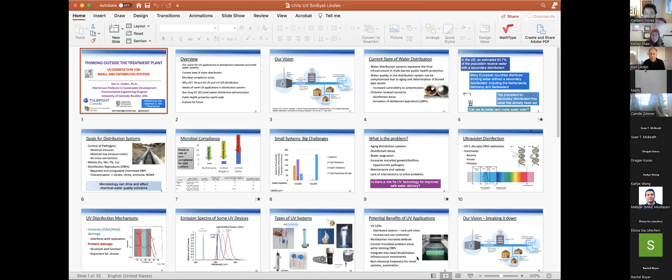Awesome. Can you see my screen okay?

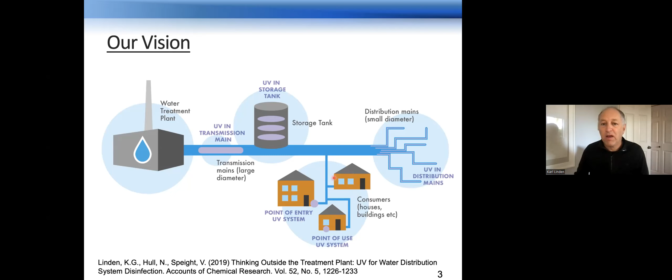Certainly UV is used in a lot of those systems that take water from lakes to protect the water in the household. At the point of use in the faucet or in, say, a water cooler, UV is already used in those applications. How can we bring UV more into the public as well? And then as we get deeper into the distribution system, is there a way with UV LED technology maybe to bring UV light into distribution systems and smaller pipe networks and help minimize biofilm formation in buildings and other distribution branches, and thinking about control of opportunistic pathogens in those cases as well.

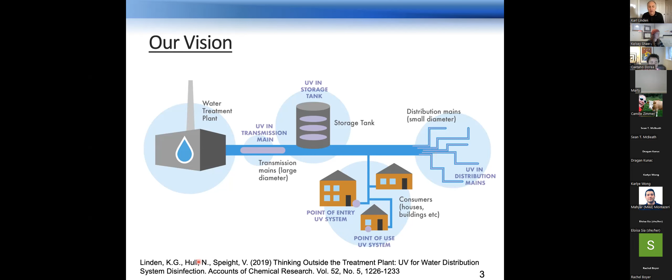We laid this all out in a kind of think piece a couple of years ago in Accounts of Chemical Research. My co-authors, who I'll introduce a little later, Natalie Hull and Vanessa Speight, helped with this vision. So what is the current state of water distribution? We know that this is kind of the last opportunity to protect public health, in thinking about water.

Oftentimes the compliance point is as it's entering the distribution system, and what happens in the distribution system could be a challenge as far as degrading water quality. We know that aging of pipes and deterioration of infrastructure can contribute to problems, whether chemical based or microbial based. And we also know that most water systems in North America are required to have a chlorine residual, and as that residual decays, there are opportunities for pathogens to form and grow in biofilms. We also have the concern with chlorination of the formation of DBPs, or disinfection byproducts. So that's another concern because we use chlorine.

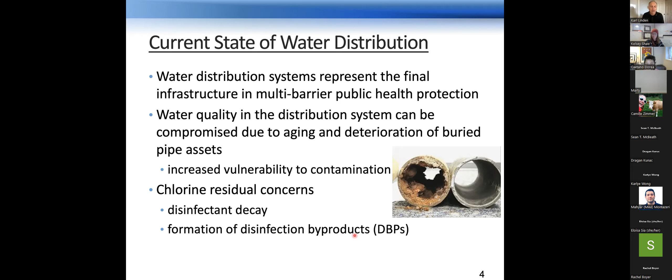In the US, about 94% of the population receive water with a secondary disinfectant. A lot of small systems aren't required if they're small enough. But in many countries around the world, especially some European countries, there are water distribution systems that don't use secondary disinfection. This includes systems in the Netherlands, Germany, and Switzerland. And when you look at those systems, they're operating fine. People are not getting sick all the time.

Certainly they do water treatment a little bit differently than we tend to do in North America. They're more biologically focused, perhaps, using biological filtration or granular activated carbon, whereas we tend to shy away from those things. But it's a fact that many countries don't use any secondary disinfectant, but we're required to in Canada and in the US. So the precedent for not using a secondary chemical disinfectant has already been set.

But we have all these problems, and is there a way we can think about other alternatives? Is chlorine really the end of our solution set to help protect public health as water moves through the treatment plant into the distribution system? Certainly, I think we can do better, and we can have safer water.

As far as distribution systems go, some of our goals are to control pathogens for sure. We want to minimize intrusion events. We want to avoid low pressure events where contaminated water might get into the system. Certainly, we don't want any cross connections. We're concerned about metals. Lead is a huge issue in many systems. And obviously DBPs, whether from chloramination, we can even think about NDMA as a DBP, but certainly the regulated and unregulated chlorinated disinfection byproducts.

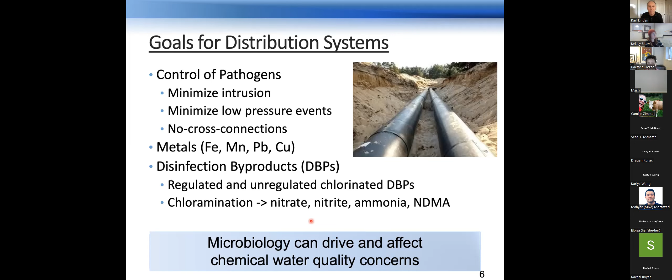We know all of these issues are also driven by the microbiology in the system, and chlorination puts pressure on the microbial communities that are able to thrive in water. That could also be contributing to some of the problems that we have through that selective pressure.

And so you ask the question, I thought chlorine is supposed to protect us against microbial issues in the distribution system. But in the Netherlands, there's no chlorine residual. In the UK and the US, there is a chlorine residual applied, yet we have these challenges of non-compliance that are higher than in countries that don't even use chlorine. So this brings a lot of questions to my mind, something I've been thinking about since working on UV technologies. And when you look at small systems, we've had bigger challenges.

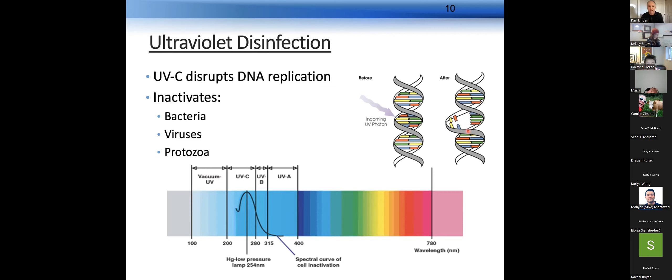And especially for viruses, this is really important because viruses use proteins as part of their infection cycle. The fiber proteins or proteins on the outer parts of the virus act to actually find the host cells.

And if we can damage those proteins, the virus won't be able to find our host cells, won't be able to cause an infection in the first place. So protein damage tends to be very important for virus inactivation. And we find these low wavelengths are very, very effective for viruses.

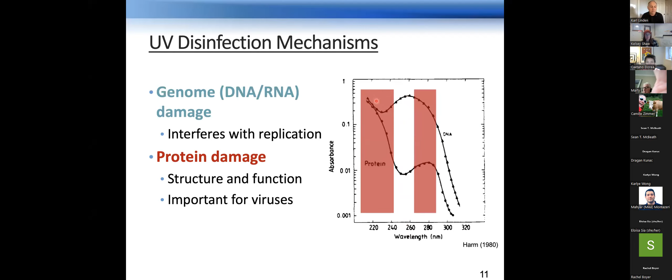In fact, sometimes up to 10 times higher than the typical UV at 254 nanometers, which is used for most disinfection applications. So low wavelengths are also really interesting to use in a big research area and a number of research groups. There's many types of UV devices that you can use.

These are exactly the same construction, except they don't have that white phosphor coating on them. They're just clear quartz. And the UV light generated in those mercury lamps is purely at 254. And that's very effective for inactivation, for DNA damage. But there's other UV sources that are really exciting too, especially the LEDs.

And then we also have the krypton chloride excimer lamp, which is a new technology we've been working with quite a bit that emits really purely at 222 nanometers. And I'm really excited about this because this is really enhancing virus inactivation. And also this is a wavelength that is fairly safe to use around humans. It doesn't absorb deeply into skin or eyes.

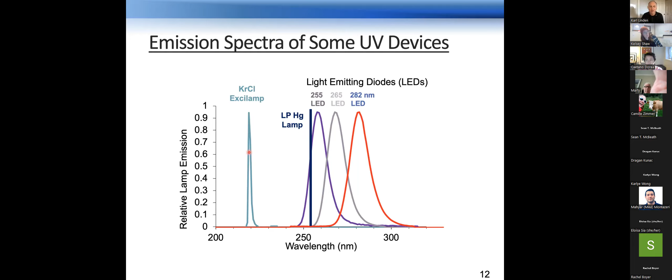I just actually was out canoeing in the Algonquin region outside of Toronto 2 weeks ago. It was a really beautiful canoe trip. Brought my SteriPen, just took the water out of the lakes there, just put a SteriPen in there, 30 to 90 seconds, and disinfected the water, drank it the whole time, didn't get sick. It's great technology. I really love bringing it places, especially when you travel internationally as well.

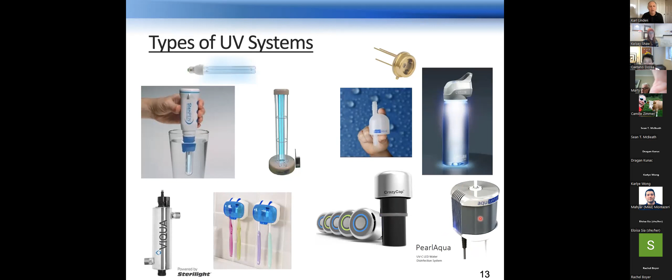So lots of opportunities for UV. These are just, you know, tip of the iceberg kind of applications. There's way more that you can imagine as well. So what are the benefits of UV? I mean, for LEDs, thinking about these small chips, these are really small millimeter sized UV emitters.

I mean, if we can get these distributed, we can put them all over the place and have disinfection. Really think about distributing LEDs around in pipe networks or for protection of water sources, but certainly increasing the end user protection in this case, whether it's on your faucet or under your sink or in your water bottle. It's definitely part of a multiple barrier microbial defense.

It can control all types of microbes with a very low dose. So very quickly, just a matter of seconds. You saw with the SteriPen, it takes 40 to 90 seconds, but typically most UV systems act in less than 1 to 5 seconds for disinfection, which is kind of incredible when you think about chlorination requires 20 to 40 minutes, maybe 60 minutes, depending upon the dose and the CT value that you're required to achieve. UV acts in just a matter of seconds, and it limits DBPs because there's no chlorine, there's no halogens, there's no halogenated byproducts. So no problem with DBPs at all.

You can easily integrate them into infrastructure. If you can think about putting them on the end of a system, maybe in the middle of a system in a coupling that brings two pipes together, there's no chemicals, and it's really ideal, I think, for small systems where you have a lot of point of use and point of application collection, and you can also automate UV systems. There's no chemicals to use. There's no extra supplies to bring. It's all electrical signals. You can monitor this through a cell phone. So I think there's a lot of great benefits of UV applications.

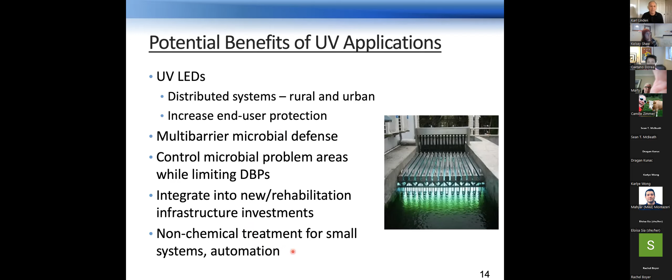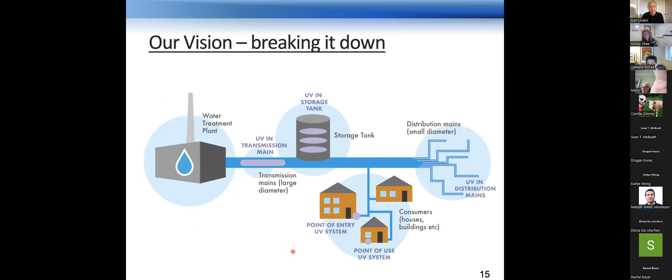So let me quickly walk you through some of the vision that we had in different aspects of UV applications outside of the treatment plant, and then talk about some small systems as well in the study we did. So again, thinking about this whole ecosystem outside of the water plant, at the water plant itself, we know that UV works. It's used as a primary disinfectant. It's used in the largest water system in the world, New York City, where I'm from, I grew up in Manhattan. I'm proud to say that New York has the largest, treating about 2 billion gallons of water every day using UV light, and that's to protect against cryptosporidium mostly.

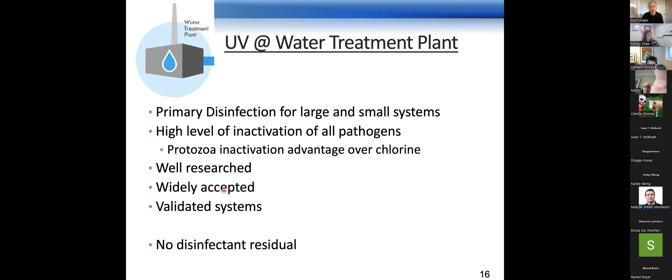It's got high levels of protozoa inactivation, which is great because chlorination doesn't work at all for cryptosporidium, and it's very poor for Giardia. But UV works as fast as it does for anything else. It's really well researched, validated, no problems there. It's used all over the world. It doesn't have a disinfection residual, which sometimes people say is a concern, but in some cases maybe that's a benefit, because in a lot of places maybe you don't want to have that taste and odor issue, or those DBPs. But certainly for treatment plant-based applications, it's well accepted.

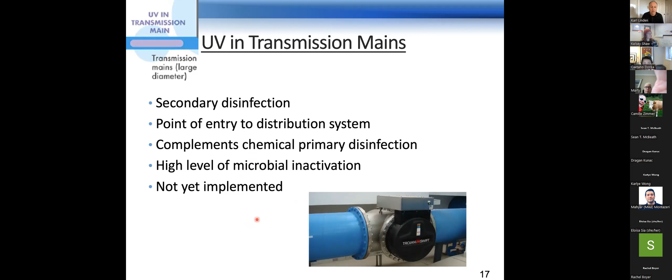In storage tanks. If you've ever been to New York, there's storage tanks all over New York City on top of buildings. I always wonder, where's that water go? Is that used in the buildings that they're serving? Is it just pressure? Is it fire? Whatever it might be, there's storage tanks all over, but these are often ignored, and these can be breeding grounds for microbial growth, for biofilms. There's lots of different ways you can think about adding UV in here. It could be some floating ball that's bobbing around in there. It could be on the lights on top of the ceiling, but these aren't really used yet. And we don't know much. We need to do some research on this.

We don't really know the implications on the materials and if it's really going to control biofilms. Can you pulse it on and off? Do you have to have it on all the time? Is it going to disinfect pathogens? Will it have any impact on water quality? These are questions we need to ask and research we need to do.

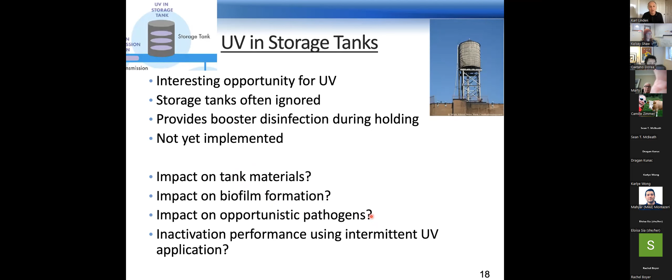But certainly there's good opportunity to add UV in these kinds of situations where you can add some disinfection as the water is being stored. At the point of entry or point of use, UV is already used in a lot of these cases. It's well established as a primary disinfection for water coming out of a tap or water going to a building. Small systems are available, already validated by National Sanitation Foundation. These systems are validated by different organizations as well. This can be an easy way to provide disinfected water on tap, on demand.

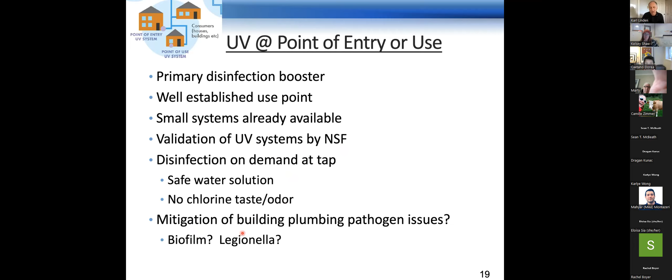There's no taste or odor issues, and a lot of people are averse to chlorine taste and odors if you're not used to that. And then certainly in building systems, it could be helpful for controlling issues around sloughing of organisms, Legionella, those kinds of things.

Then getting out to the distribution system, this is where it gets a little bit far out, but I really think there's opportunities here. Is there a way to maybe control biofilms if we had UV throughout the distribution system, these LEDs kind of embedded into pipe systems? Is there a way to think about adding types of disinfection in these areas of the distribution system? With LEDs, I think there are.

Other things you might think about are these little UV robots that might go through a pipe network and have a bunch of LEDs on the outside, just rolling through the distribution system, disinfecting the biofilms, disinfecting the organisms as it cruises through. Could be part of a cleaning process, could be part of an upkeep process. But there's ways to think about, given the LED technology, how we can implement UV all throughout the water distribution network. But more questions to ask, of course.

What are the pipe materials? Are they going to degrade? Are we really controlling biofilms? Are we controlling opportunistic pathogens? Are we changing the water microbiome even, in ways that we didn't anticipate, that might either offer the opportunity for better control of pathogens, or maybe there's even some type of probiotic effect of UV compared to chlorine. We just don't know.

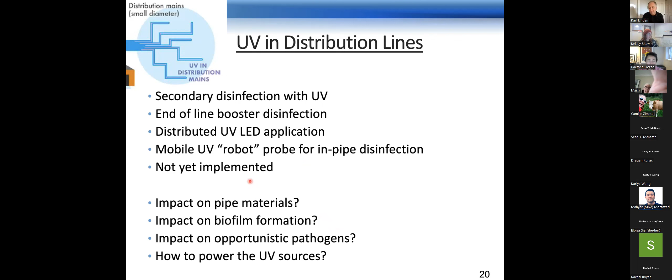And then, of course, we have to power these sources. And the nice thing about UV LEDs is they can be powered directly by DC current using solar and other renewables. So there's a possibility there. And we have to think about how to marry the solar opportunities with some of the LED disinfection opportunities. So that's kind of our far out vision for how we might integrate UV further outside of the treatment plant.

But a more practical application is certainly, how are we going to think about adding UV to the more vulnerable water systems? And we asked this question. As a researcher, you never really want to do a year-long study. It's going to take forever. What if this doesn't work out? But we just decided to do this study as part of the DeRISK Center. We had a small systems center at Boulder a couple of years ago.

One of my former PhD students, Natalie Hull, who's a professor at the Ohio State University now, worked with the folks up in Jamestown, which is a small town of about 300 people just outside of Boulder, about 20 minutes up the hill. They get water from a really nice clean creek throughout the year. And they agreed to let us put in a UV LED system and leave it there for a year.

It ran right in parallel with their chlorination system. They use slow sand filtration as their primary treatment, and then they use chlorine. And we said, let us do a side-by-side challenge with chlorine versus UV throughout the year, have this battle going on for the whole year. So we could easily get up there and test it. We went up there every couple of weeks and took measurements.

But as far as small systems go, these LEDs have a really small footprint. They're really resilient systems. You can intermittently operate LEDs, and you can monitor them autonomously.

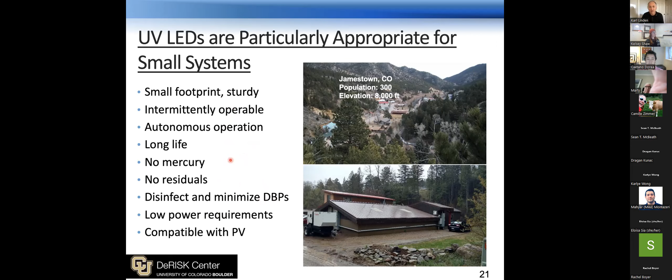No mercury, no residuals to deal with, minimized DBPs, low power, and it's compatible with photovoltaics. It seems like a no-brainer, but no one's ever done a really long-term study. So we went ahead and tried this out. We used this system called the AquiSense, the Pearl Aqua. Now it's called the Pearl Aqua Deca, I think.

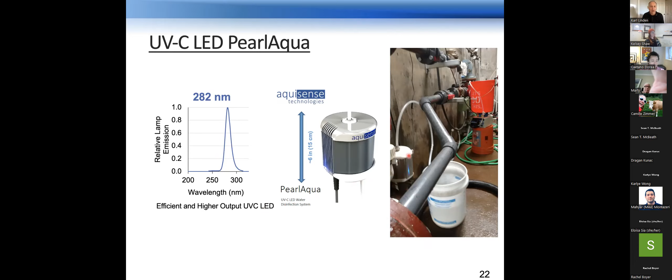But this has 282 nanometer LEDs, and this is what the peak output looked like. Wavelengths between about 270 up to 290 are emitted through this system. And we just took a small side stream off of the system, about 0.5 liter per minute, and we ran it through this Pearl Aqua, and we set it up, and we monitored it throughout the year. And we did this side-by-side trial against the chlorination system.

So we really dealt with this varying water quality, and the LED system, we didn't touch it for the whole year. All we did is collect samples. We didn't clean it. We didn't replace it. We didn't check the bulbs or anything. We just let it run. We knew it was on. We saw the signal, but we didn't touch it. We just wanted it to run and see how it would do throughout the year.

And looking at the microbial water quality coming off this, we measured ATP kind of as a measure of microbial activity. We measured total coliform. We measured E. coli. And the data here show the filter effluent, FI, filter influent. This is in and out of the slow sand filter. And then we have the chlorine treated water and the UV treated water.

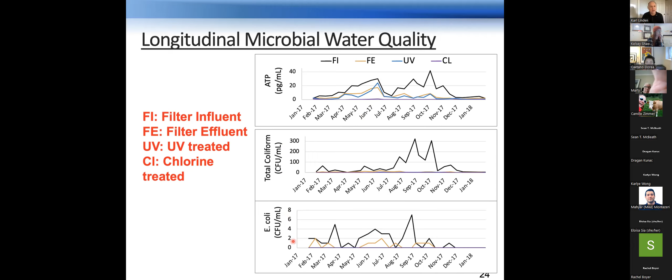UV doesn't do that. UV just destroys the organism's nucleic acids, but it actually still can respire. It's still somewhat viable at that point. It can't cause an infection, but it's still technically alive until it dies off because it can't reproduce. So you do see that ATP signal, which is really interesting. We're trying to look more at ATP as an interesting indicator for UV applications, but certainly coliform and E. coli, we didn't see any at all throughout the whole year, which is pretty incredible, both for the UV and the chlorine side.

So at the end of this demonstration, this UV LED reactor, it's resilient for a year-long application. It went through adverse conditions. We had no maintenance at all, as mentioned, near freezing temperatures. We had spring runoff issues. As far as the town was concerned, they're really excited about it. The whole system for the whole year cost less than $25 to run. This is, again, just 0.5 liter per minute.

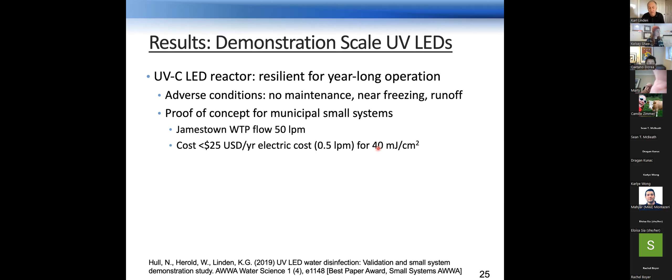And these are actually systems that are now, I'd say, 10 times more efficient in 2022 versus 2017. There's great improvements. We'd see even lower costs now and easily higher flow rates and higher doses. But these are doses around 40 millijoules per square centimeter, which is a typical dose that you want to see for disinfection. So we're really excited that we maintained the disinfection performance with no chlorine added and operated as good as a chlorination system for all the indicators we were looking at.

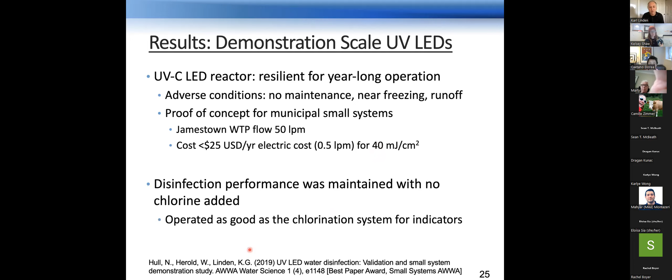And we put a paper out in AWWA Water Science, and this actually won the best paper award for the small systems division. So we're really proud of this work. Really good to invest the year, and the undergrad who helped out tons on this, but Natalie did an amazing job with this research, and we're really excited to finally have a year-long trial that really proved that UV LEDs can work.

So thinking about applying this around the world, we're really excited about UV technology. It's definitely something we feel needs to get out and protect public health all over the place. And we do a lot of work in low and middle income countries that have concerns with water quality around their hand pumps and community piped water systems. There's no reason why we couldn't put UV in these systems. We need to sustain services in these communities, need to protect water quality.

Oftentimes you bring chlorine in as a solution, and if folks aren't used to chlorine, or they don't like to put a chemical in their water, maybe they think about water a lot differently than people in North America do. It's not just an object that we're consuming, it's actually part of the spiritual world, and it's part of the earth. Why do you want to put a poisonous chemical in it? That's kind of baffling to a lot of people, and so I think we need to be considerate of those types of cultural concerns. And just practically, the taste and odor of chlorine, people often don't like it.

So if you can come up with a solution that's not going to change the taste and odor, maybe there's ways to think about integrating UV into tap stands. So when folks come and bring their jerry cans to a hand pump, is there a way to challenge yourselves? Can we integrate an LED disinfection system in this network, in this pipe, in this hand pump? Can we power that as the hand pump is going up and down? Can that power the LED system? Can we get a small solar system on there to help power it? There's lots of really interesting applications and research we need to do to bring safer water to these communities.

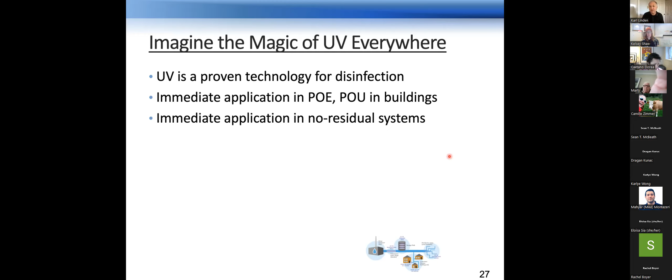Systems that don't use residuals. I mean, if systems, say a small distribution system in a small rural community, are not required to have a residual, there's no harm in putting UV in. It's going to help that system and help meet compliance and microbial issues.

I think, as we think about infrastructure reinvestment, it's the talk of the town now in the U.S. with the various bills out of the government, but the pipe replacement that's going to have to happen with lead pipes and corroded pipes and almost ancient infrastructure in a lot of communities. Can we install new systems that have a thought to the future, maybe embedding UV, at least putting UV in along the distribution network? Think about that now, and as we build those systems out, make sure we have room for new applications. And really, for small systems, it's almost a no-brainer.

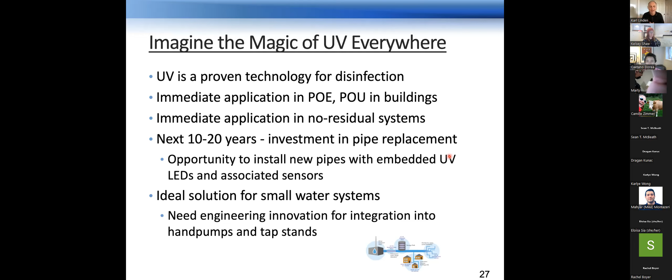It's an ideal solution. We definitely need innovation among the engineers to integrate UV into hand pumps and tap stands, and really bring the technology to people, make sure they don't even notice it's there. They shouldn't even know it's there. They don't need to know it's there. All they need to know is that the water that's coming out of that hand pump or tap stand is going to be safe and free of microbial contaminants.